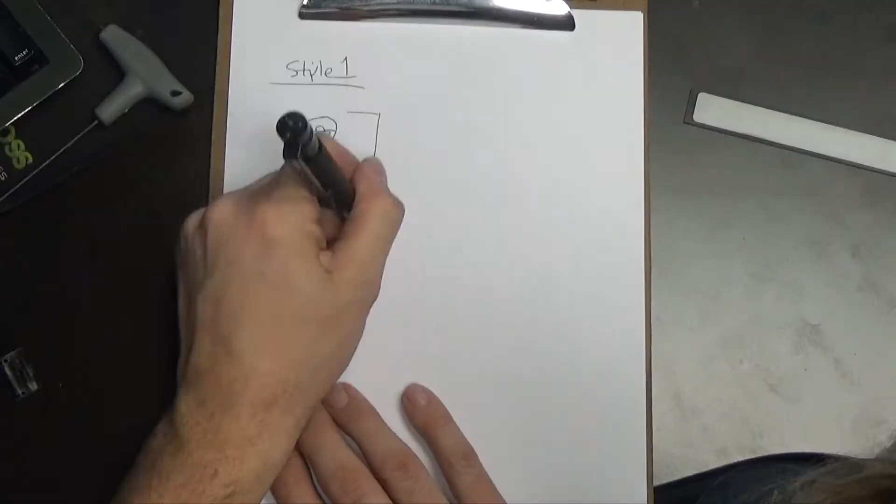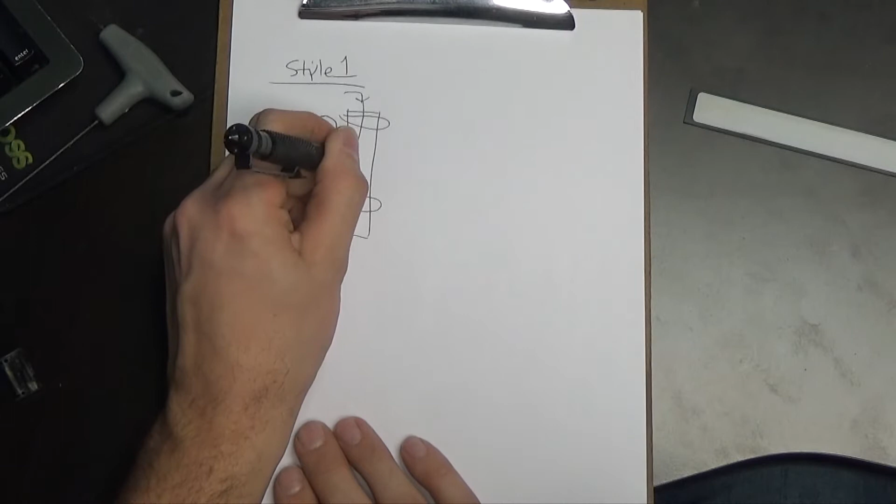If you look at it from a side view, the circuit board goes inside and it's clipped onto the body with a few plastic clips. The wiring comes in the top side, and these circuit boards clip together on the inside. There are pins that get pushed inside, and when those pins get pushed together, those boards lock in place, then they sit inside that poly tube.

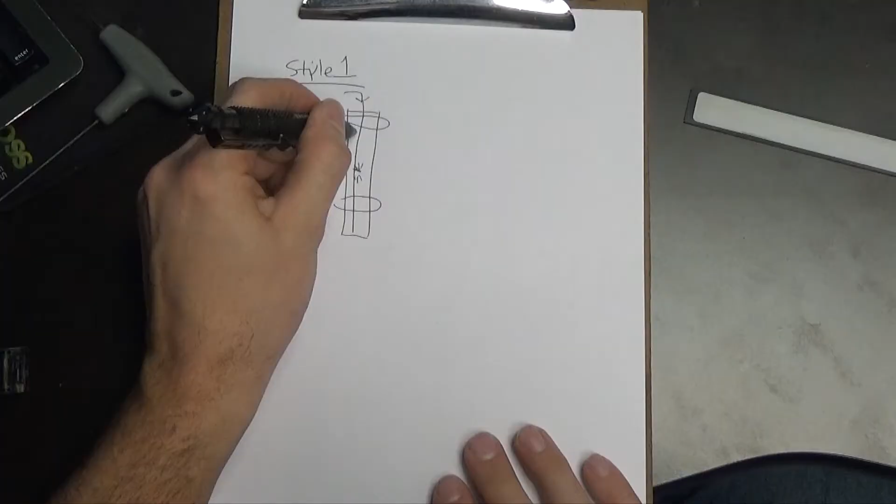So that's a low cost way to do it, and it's fine because these things are fairly bright. But the problem is that the LEDs dissipate heat off the back of the chip, and since they're just on a fiberglass circuit board, there's nowhere for that heat to go.

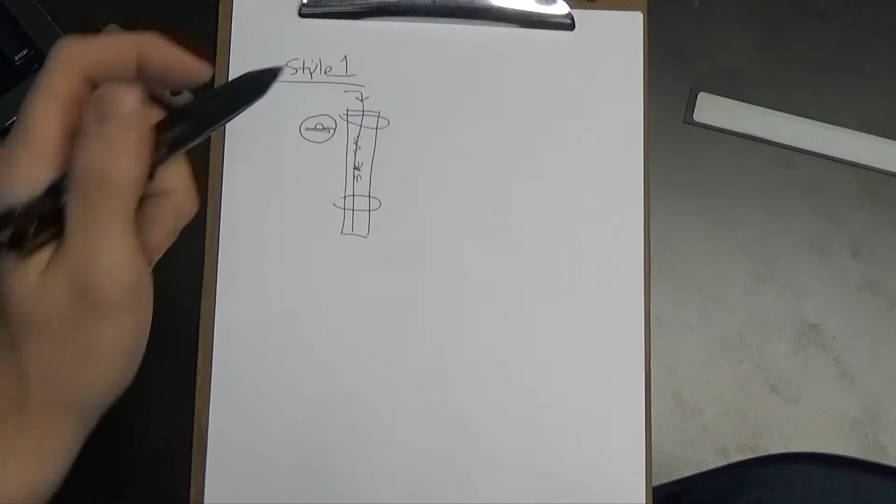And because that circuit board is inside a plastic tube, it vibrates back and forth as a truck goes down the road. So the fiberglass itself is prone to failure, and the junction where the pins interact is prone to failure. And of course the whole thing being plastic, it just takes one good whack from a K12 and the thing is trash.

The other style, we'll call Style 2, is a little bit better. This is the style where you have an aluminum extrusion, but the circuit board is cut and built in a whole long batch, then cut into sections and put inside.

What happens is these circuit boards are totally encapsulated in an epoxy bath, and that epoxy encapsulation keeps them from having problems with water. It keeps them waterproof, but the problem is that the epoxy ends up being an insulator, and then of course you have a temperature problem.

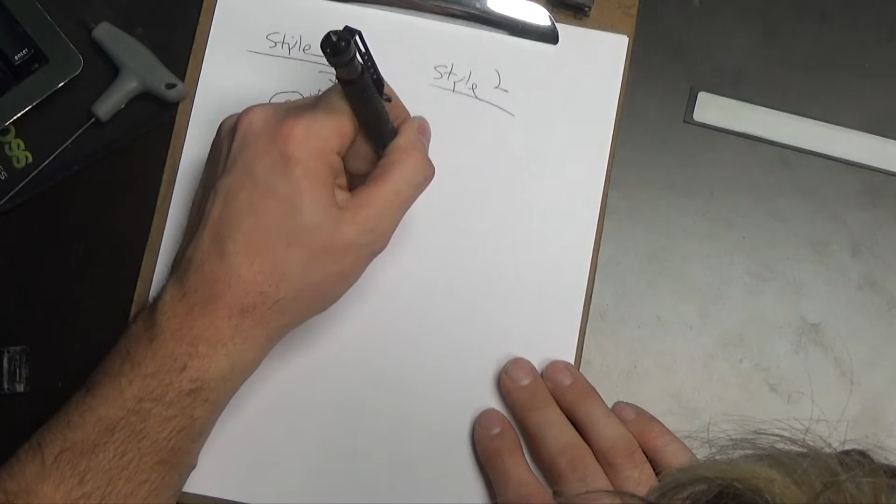Let me just draw this out. When you look at this type of extrusion, we've got a little pocket, and then coming back up we've got the rest of that pocket. This type of extrusion has a circuit board that sits in here and slides in—let me draw this circuit board.

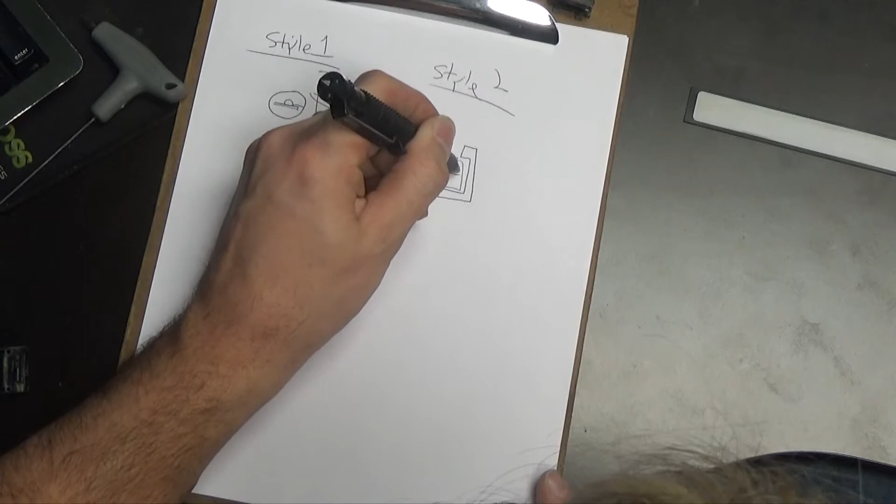The board sits in the middle of this epoxy encapsulation, with LEDs on top. What happens here is the whole piece is sort of similar in that it's extruded, but the circuit board can't get rid of the heat because the whole area around where the chips are is encapsulated in that epoxy, and epoxy is like a plastic—and just like anything, plastic is an insulator.

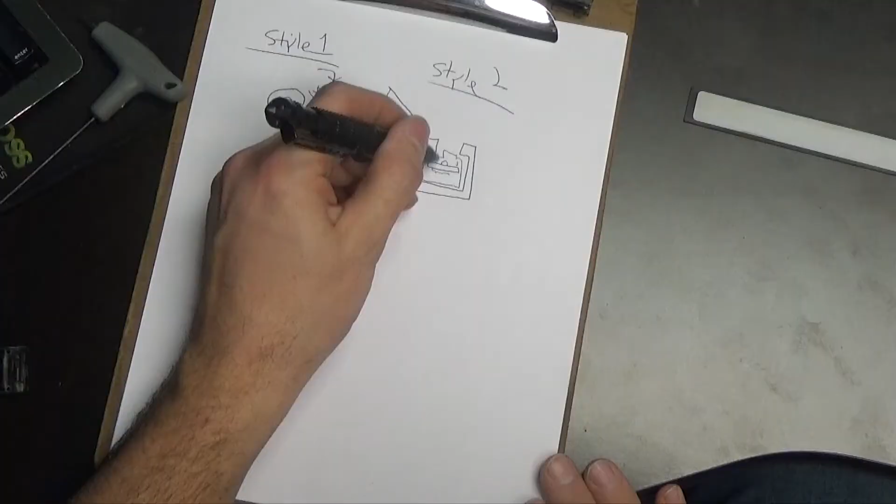So this style is a lot better than the first one because it's more durable, more waterproof, and gives you a little more light output since it has some strength to it.

But Style 3 is the FireTech style, and we build the circuit board more like we do one of our scene lights, like our FireTech brow light. Let me draw this out and then I'll point to it on the fixture. So, FireTech.

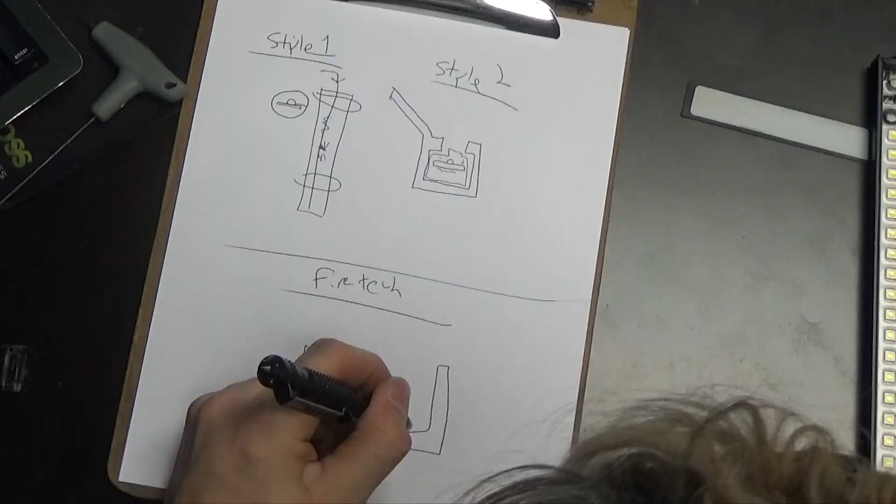So the way that our fixture goes, this is the housing right here. If you look at it down the side, it's shaped like a U. Sitting directly on the housing is our circuit board, and on top of the circuit board, of course, is the LEDs.

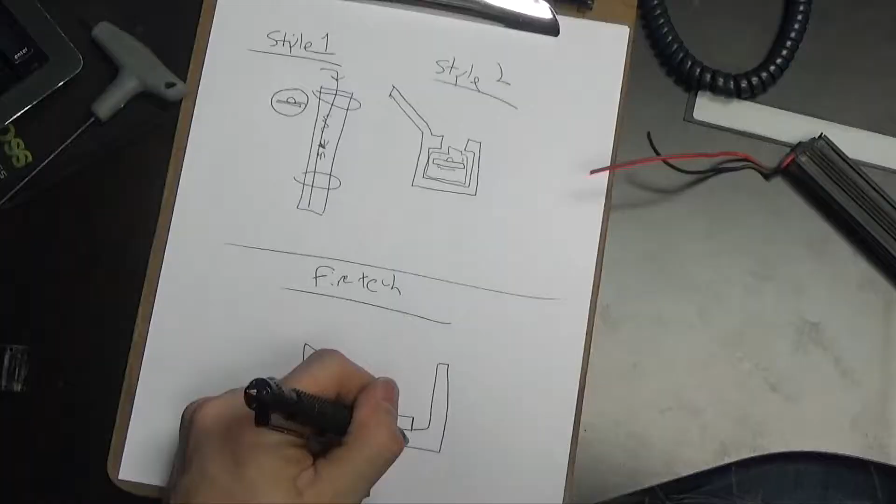But the heat from these LEDs pushes back into the housing, and this aluminum housing has ribs on it, and those ribs act like a heat sink. So this whole big aluminum housing, because the circuit board is bonded to the aluminum housing, allows way better thermal dissipation.

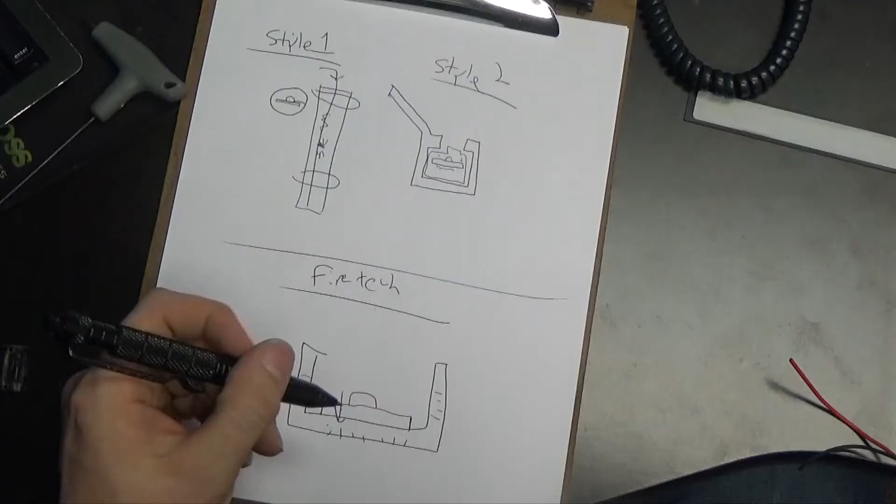And the key to the success of an LED over the life of an apparatus is the ability to manage the thermal load, the ability to shed heat, because if they get too hot, then they break down and they just fail. So the problem is when you bond these together, now you've got a big void space, and you don't want water getting inside.

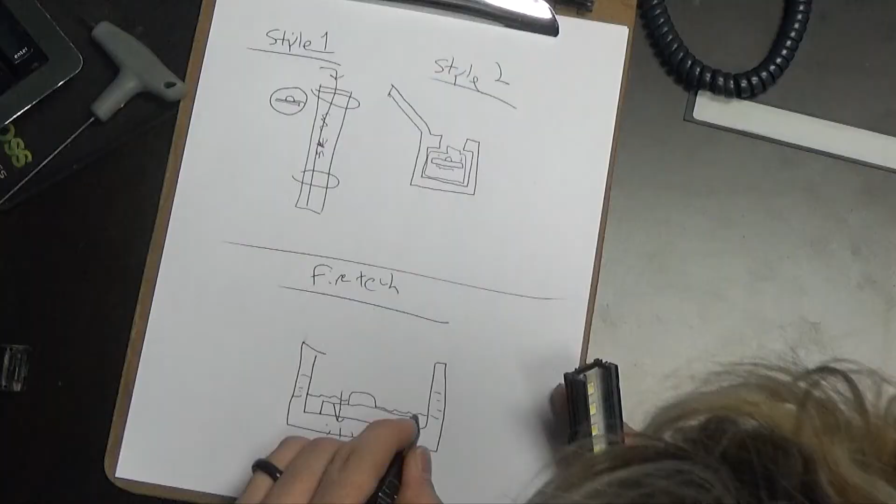So what we do is we epoxy encapsulate, once the fixture has been manufactured, up to the top half of the LEDs. So the board is bonded to the housing, and then we epoxy the top half and keep the open face, the phosphor face of the LED, out to the atmosphere. If you look here, you see how that whole area would be covered in the epoxy potting, so that keeps it totally waterproof.

But then we also add a little ridge on the top side, and then we have a gasket right here. If you look at this piece, this is actually that gasket. I can pull a piece of it out. You see that gasket right there?

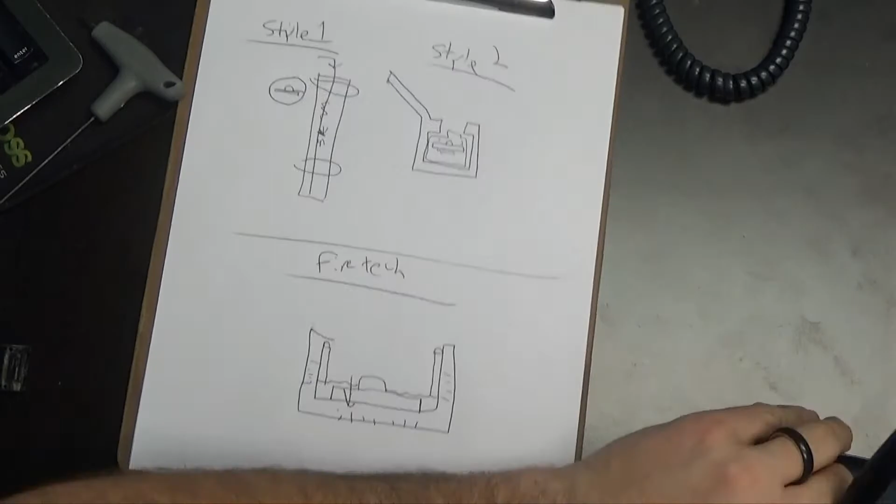So that gasketed material goes on the top side, and then we add a lens. That lens goes on top of the gasket, and when you pop it in place, I can even show you here, when you pop it in place, it creates a waterproof seal.

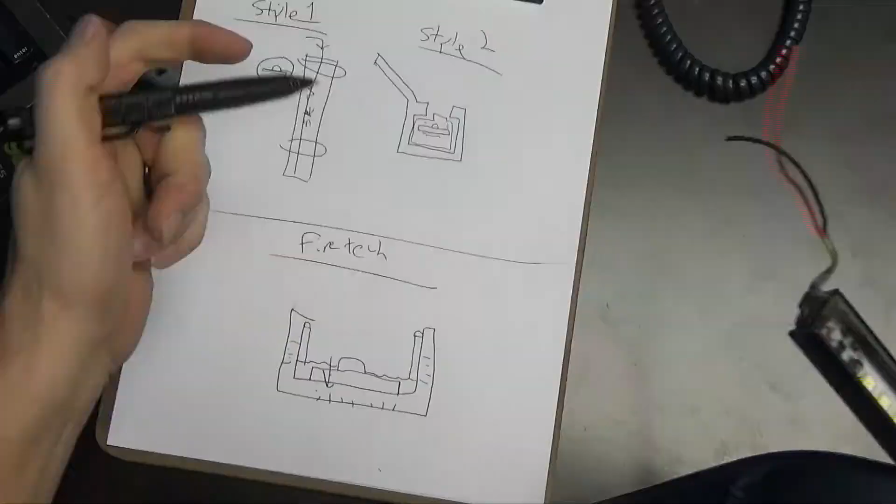And so we not only have a waterproof design where the circuit board is epoxy encapsulated so you don't get water on the LEDs, we also have a lens on top of it that is also waterproof, so the whole housing is designed to be used in higher vibration environments, because we don't have to worry about these style 1 type fixtures where the circuit board rattles around inside of a piece of plastic tubing.

It's designed for high temperature environments, so like a closed compartment, or even the underside of a fire truck where you've got dirt and junk and trash all over these things. We're able to dissipate the heat because of these fins and the aluminum housing.

And we've also got the durability of having all aluminum mounting points. So when you look at this, the lens gets installed on the top side, and then we have an aluminum end cap. This light here has actually been under my truck for a couple of years, and we just pulled it back for some testing. This all aluminum end cap bolts into this extruded housing.

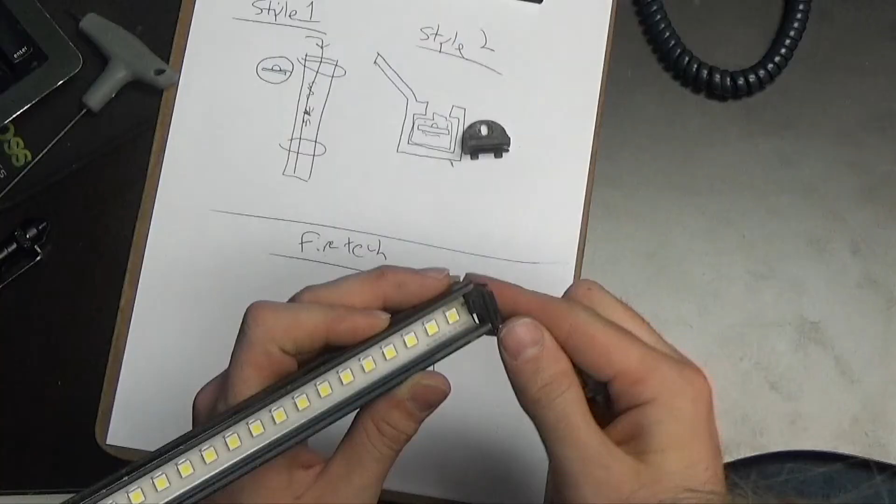And when it's bolted on, there's a little rubber gasket that goes over here. Oops, here it is. And when it's bolted on, it allows for a mechanical fastening of the housing all the way to the fire truck body.

So the likelihood of this thing getting knocked off the truck is very low because of this aluminum end cap and aluminum housing holding an aluminum circuit board all on board the compartment of the fire truck. You can bang this thing as hard as you want. The K12 is not going to rip this thing off the side of the truck body because it's actually mechanically attached using aluminum and screws.

So anyway, there's a lot of different types of compartment lights on the market. I can't say that anybody builds a bad compartment light, but when it comes to a FireTech compartment light, we started with the design requirement that this thing had to last 25 years in service, under a fire truck, on a fire truck, anywhere you put it. And this is the way we did it.